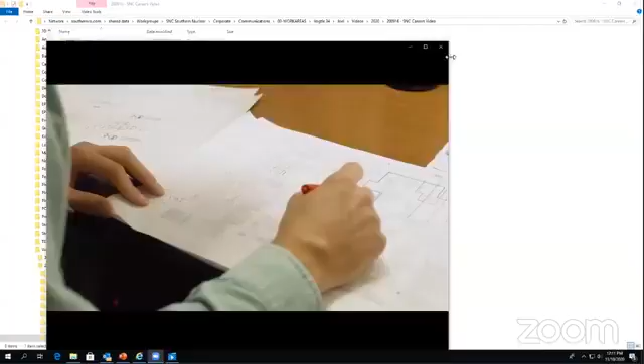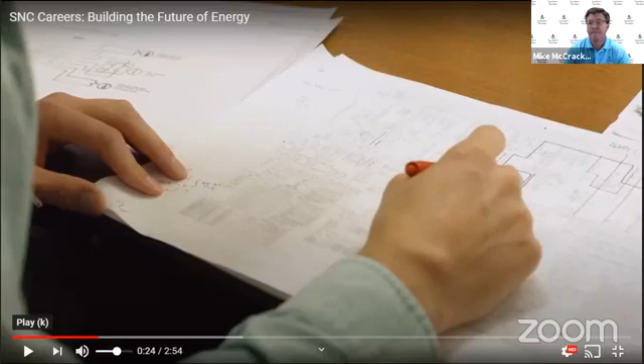All right, I tell you what, we're gonna go back to that later on. I'd like to go talk about careers through a couple more pictures and shows. Sure. Oh, you ought to see something, you ought to see the artist rendering.

Right now I'm sharing a photograph, an image with four pictures. Is that what you see, Kayleen? Hang on. All right, getting rid of that echo. I got a blank screen right now. It's being shared, but I love all the mediums you bring in, though. I'm sure they're gonna pull up here in a second.

Now, Mike, how long have you been with Southern Nuclear?

Yeah, I have, and by the way, I do have Scott and those guys behind the scenes. I do have my slide showing. So I came to Vogtle, and I'm a communications person. One thing worth thinking about in career space is, you think there's a bunch of nuclear engineers that work there, but in reality it's a small city. So I'm in communications, Nora's in human resources. She's going to join us here in a minute.

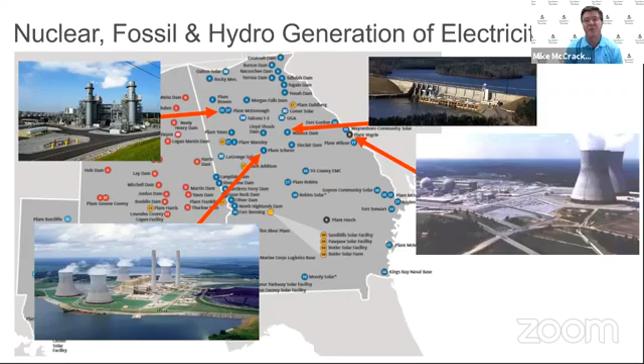And so we have accountants, we have engineers obviously, but we have a lot of mechanics, electrical mechanics, instrument control, operators. So I arrived about 12 years ago, actually 14 years ago, there was just a stake in the ground where we're going to build these plants. So I came to Vogtle because of this opportunity.

And then we started excavation in 2009 and started real construction in 2012. So it's almost like a small city. We have nurses that work for us. We have a little bit of everybody there. And our company, Southern Company, Georgia Power, we have lawyers and doctors and everything else, right?

Oh, by the way. Well, it looks like we got the video.

We provide electricity in a clean and safe way too. My role in that is developing design change packages that are used to help upgrade the plant. I also support troubleshooting, that's where I get into the field a lot of the time, and I'm supporting the operations team to identify issues and resolve them. I like to go out and walk down all my equipment, and I can take an extra look at the things that had issues identified on them to make sure I understand the full scope of the issue.

We are in asset protection and chemistry. We monitor the plant components and all the water that's going through, so we keep corrosion down. As a system operator, I have to be able to see what issues and problems are being identified by the site and how resources are being aligned. We all get together and discuss the plant priorities and anything that's going wrong with the plant, and we fix those issues as a group.

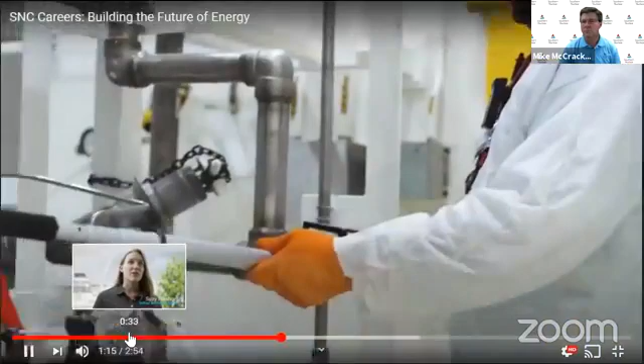In RP, we're going to be the first ones in, we're going to be the last ones out on a job. We go in, we set up radiation boundaries, or clean up any contamination or spillage, anything like that. You never know what you'll be working on day to day. It could be a nice, easy fab job in the fab shop, or it could be some hot stuff on the turbine deck where it could be 100 degrees, but it's always something new and something different.

The satisfaction I get out of this job is providing to the community around me, and so every day my thought is, how can I improve it better than it was yesterday? I like that Southern Nuclear gives the opportunity for development, not only professionally, but personally. I still enjoy coming to work, I get to fix things, I still learn something new pretty much every day.

And the pay part of it doesn't hurt either. The compensation is good and the benefits are amazing. I work with really high quality people and I have managers that care about me, my family, and my work-life balance. You have to be willing to work.

There's a lot of things you have to put up with at the plant. You have long hours, long outages. The heat in the plant is another thing you have to deal with, so it's not all easy.

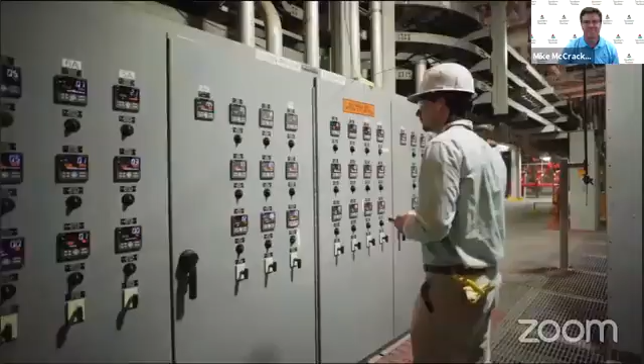The most interesting part of our jobs are the places we get to go. We're working around a spent fuel pool, or we have to go inside containment. Those are places that people rarely ever get to see.

At Southern Companies, we're always leading the pack in our industry and maintaining our plant. We're truly improving it and making it better. It matters that we have a safe workplace, but we also have a safe community.

That's an awesome video. Oh my gosh, the footage too behind the scenes is great.

Again, talking about the scope of the careers, we talk a lot about working in this industry, and I think there's still that mindset that you're going to be carrying around a hammer all your life and that's all you'll do. And that's not the reality at all.

Wow, that's stunning video. Yeah, there's a lot of opportunity for advancement, a lot of developmental opportunities. We also work very hard to have a diverse workforce, and that's in all ways, race, gender, age, backgrounds and experiences.

We have people with technical college background, 4-year university background, military. We hire a lot, especially from the nuclear Navy. You think about it, people who operated Navy submarines and aircraft carriers then come work for us also.

So the nuclear industry, there's 94, 95 nuclear power plants in the country, and we have 6 units within Southern Company, and we're going to have 2 more here shortly, so in a couple of years. So there's lots of opportunities in the nuclear industry that people don't really think about.

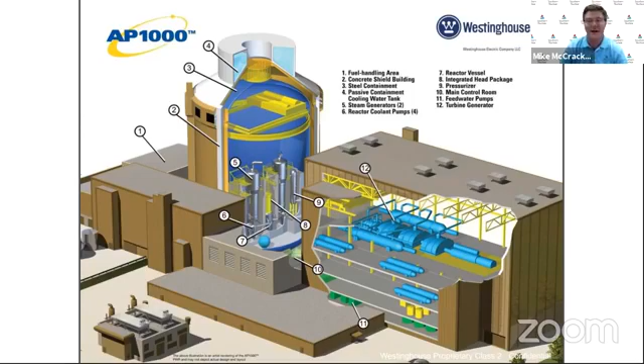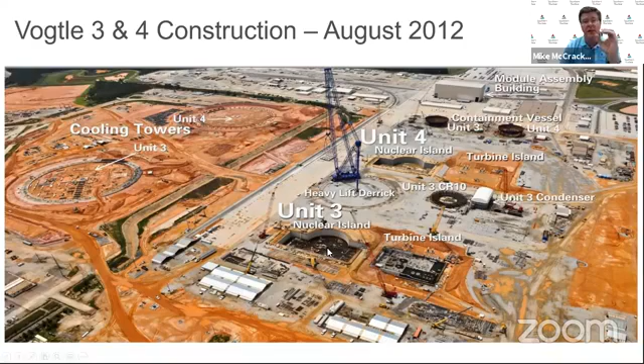And then if you look down where it says Unit 3 Nuclear Island, that's 6 feet of rebar, thick rebar. And of course, if you're going to have rebar, you've got to place concrete in and around and on top of it. So we performed a 41-hour continuous concrete placement. You think about a sidewalk or a road or a pad, that's a small amount, maybe with joints, maybe some separation. This is one chunk of concrete, 41 hours.

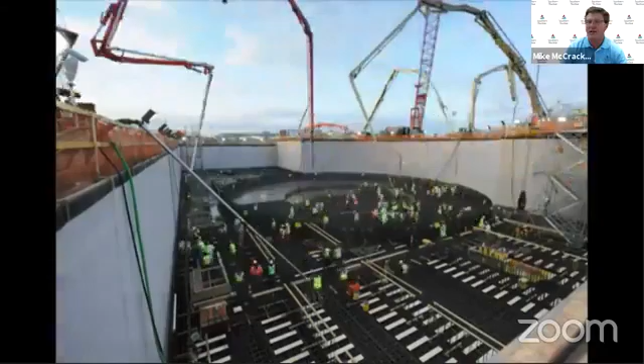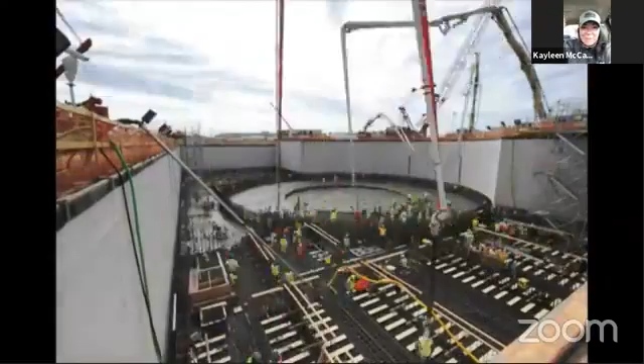You see now it's day shift. Talking about construction, these are 500 people, day and night shifts. And those are pumpers pumping that concrete, little spider legs dropping concrete everywhere. That is incredible time-lapse footage. I hope all our fans are watching this. We're getting a good science lesson, and this is just cool.

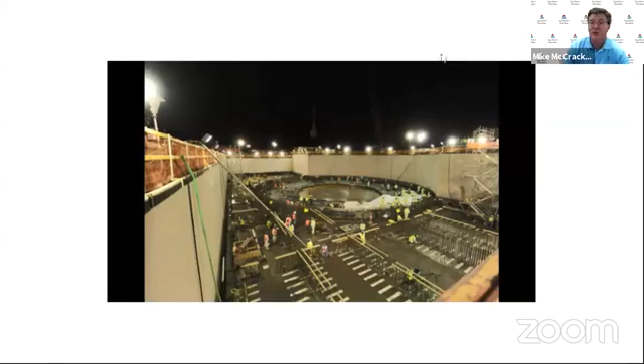And of course, you have to let it cure. So we did this twice. We're building 2 new units, and this is what I wanted to show. Now, one thing about this project, people do come and go. So a lot of this is construction like masonry and concrete people. We're not pouring or placing as much concrete now as we were earlier. Now we have a lot of electricians on site. So you see why I wanted to show y'all a couple of these.

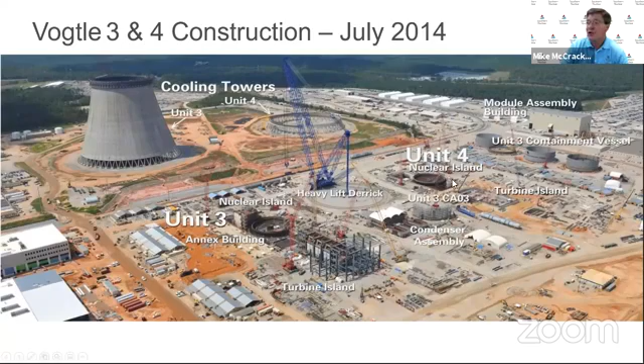Then 2 years later, 6 years ago, this is what the site looked like. You see the cooling tower is about halfway up, but that's not the power plant. The power plant's right here where it says Unit 3, and then Unit 4 to the right. So 6 years ago, this is what the site looked like. 4 years ago, it looked like this. Both cooling towers are finished, and those are 600 feet tall.

And it's amazing, the amount of concrete. Enough concrete at Vogtle, as my understanding, you could pour concrete from Miami all the way to Seattle. So it's a tremendous amount of concrete.

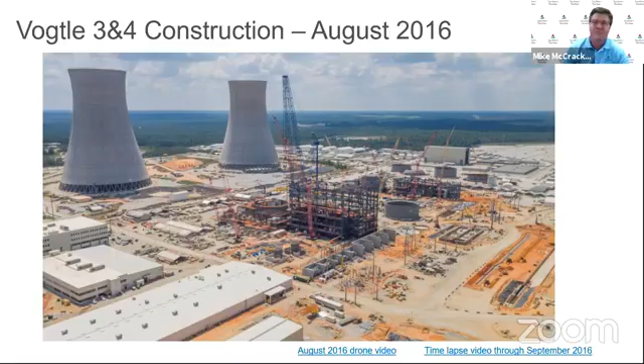Now, I think anybody in construction would get excited about this. If you have a pulse, basically, you're going to like this. This is a 5-story building that was constructed or fabricated in this large warehouse. We're building these units in modular sections. Now, how do you get this large structure way over there for that crane to put it in place?

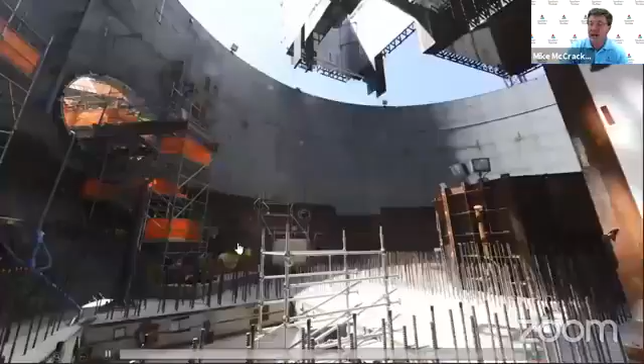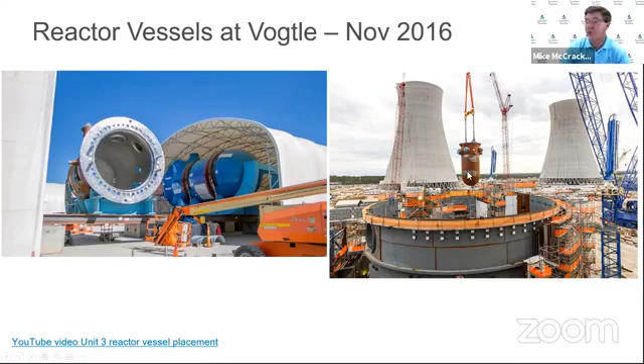And this is a picture of Unit 3 being placed inside that module we just saw. Then you put rings around it, because all nuclear plants have a containment. If there's ever any kind of leak, it would contain it. So look at the size of that, 130 feet across. How many pounds? 2 million pounds. And by the way, look at the counterweight on that crane. This is a different crane we're using. Obviously, you need a lot of counterweight or you're going to tip over.

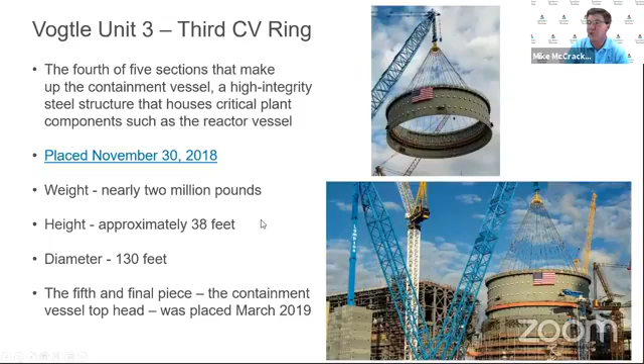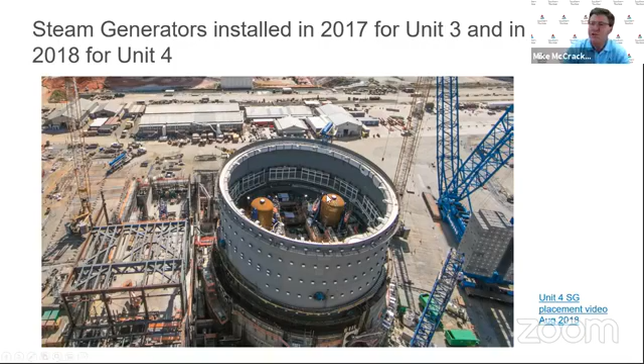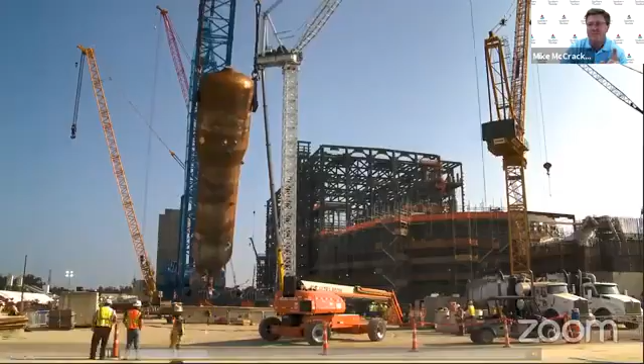And that's what it looks like inside Unit 3 or Unit 4 earlier. These are called steam generators, sticking out. These are the devices where steam is actually generated. So let me show you a really neat Georgia Power video of a steam generator being lifted. There's a little background music, but this is a 620 or so ton steam generator. It's got 10,000 tubes inside of it, so it's a heat exchanger. Hot water from the reactor goes inside, and on the outside of those tubes, steam is created.

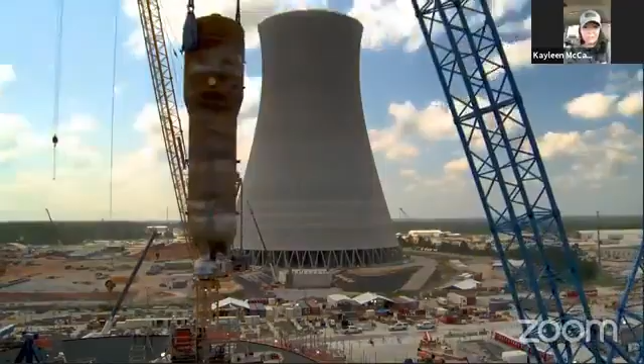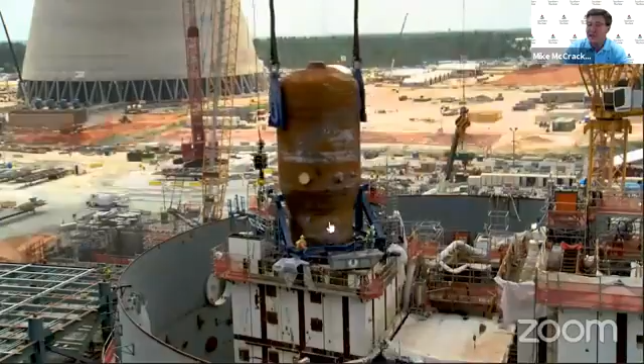Again, notice the crane, absolutely stunning, and footage that the public normally doesn't get access to see and appreciate. If you were able to visit like Scott, we'd be off to the side behind the fence. It is impressive to see it live, and everything is so big, but obviously you don't get that close. And these are construction workers here. Again, look at the size of the device compared to the feet. These are called steam generators.

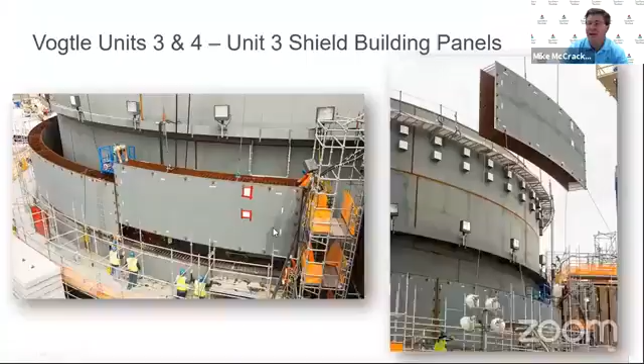I'm just saying, I'm so impressed and excited by this footage. I'm so excited that we have Nora Swanson on next too to talk about HR, because I want to work there now. This is amazing.

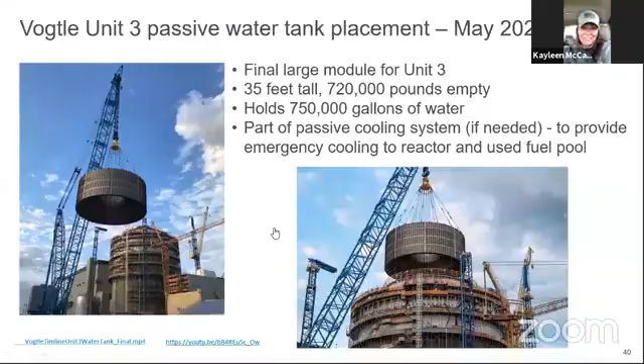Kayleen, thank you so much for joining us. My mind is melted. I'm sad I can't see it in person, because I know I'd probably freak out like a kid at Disneyland. But these job sites are stunning. It's absolutely a beautiful structure, and how fun that you get to work there and then help people work there as well. Isn't it crazy?

I mean, it is the most amazing job. And all the people that are working there together, building this one structure, it's crazy. And the jobs are amazing too.

Let's talk about that, because when I look at a structure like this, it would be very appealing for a few reasons. One, you get to work on the same job site for a very long time, and that's unique sometimes in this industry, but also the variety of jobs. So can you tell me about some of the skilled workforce that you employ there?

Sure. So we've kind of got two different worlds going on at Vogtle. We have the construction project, we are building and we are testing, and then there's the whole turnover to operation. So right now there's a lot of contractors and subcontractors working on that site. If anybody would like some information about those jobs, you would have to go through Richmond County Constructors.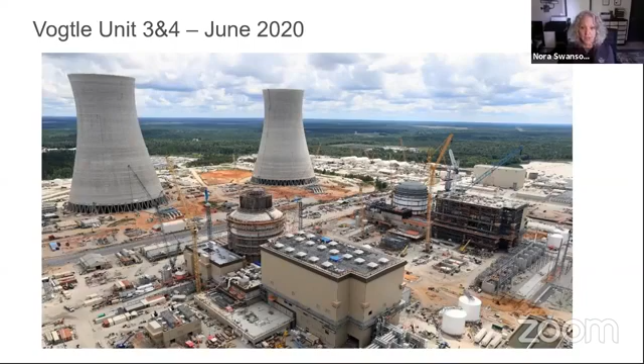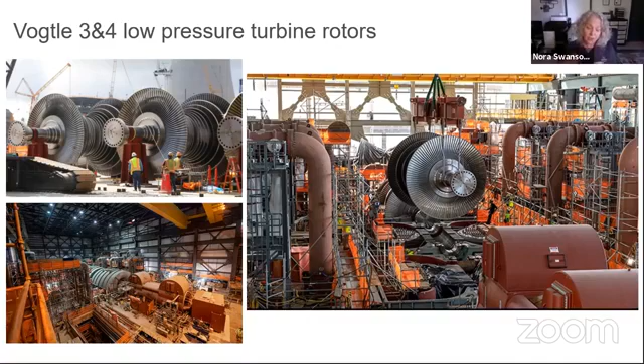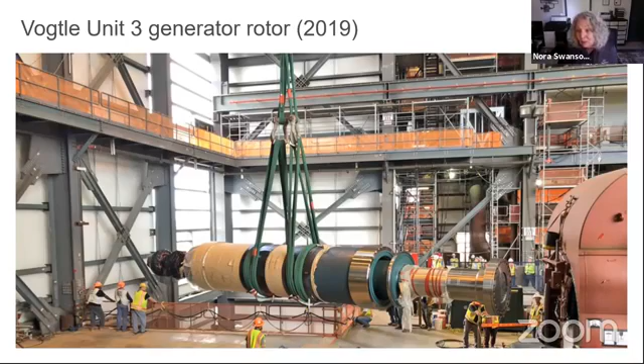The Richmond County Constructors is our subcontractor for the Vogtle construction project, so that should be listed in the chat. For Southern Company, Georgia Power, Mississippi Power, Alabama Power - it's all part of Southern Company - you can go on our SouthernCompany.com careers page and find jobs all across, including gas. So many opportunities, and that website will also tell you what you need to do to prepare.

I think sometimes people are a little confused as to what they need to prepare. Sometimes it might not be as much - obviously the safety and some certifications - but it helps with that pathway: this is step 1, this is step 2.

I'm so envious of the people who get to work there - it's absolutely gorgeous and spectacular. And to have employees, you're right, I've met other folks who work in a plant like this, and you don't leave, because why?

This was stunning and beyond informative, and I don't think a lot of people understand how nuclear power plants work. Mike, thank you so much for sharing the graphics and information - it was powerful all the way around. Honestly, I wish we had another half an hour to chat and be nerds about stuff, because this was so much fun.